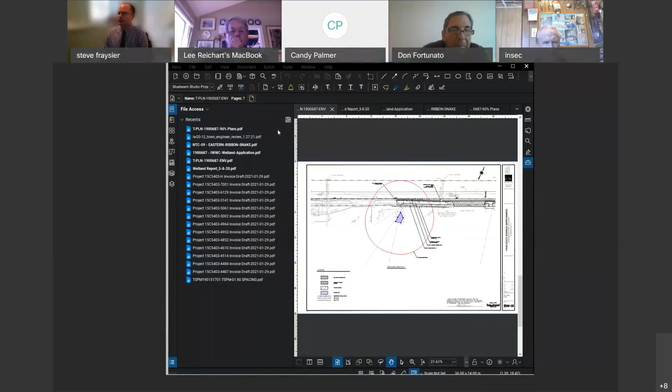Let me just share my screen so I can show the PDF. Are you able to see the PDF plan here? Yes, I can. Okay. So again, Steve Fraysier with BL Companies out of our Hartford office. I'm a licensed professional engineer in the state of Connecticut, presenting the sidewalk improvements in Pawcatuck along South Broad Street.

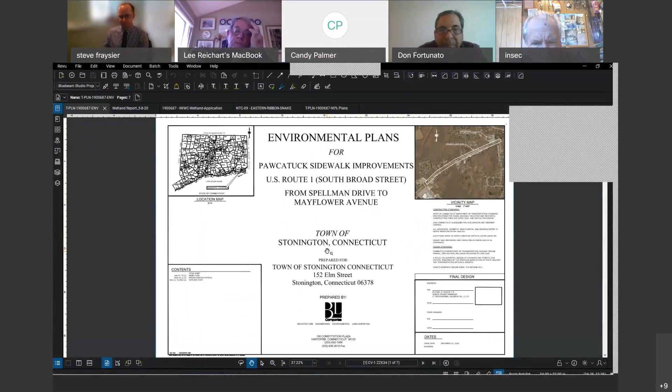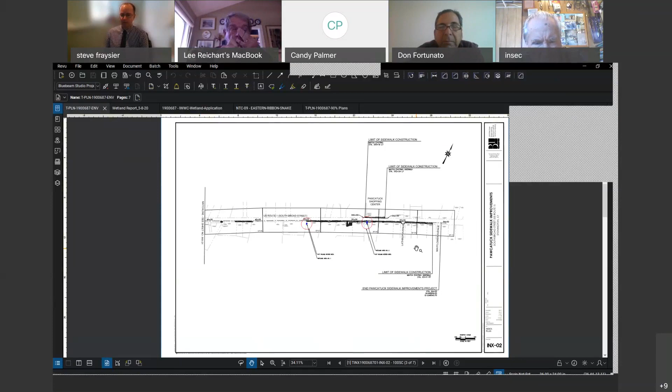The project limits for this project stretch from Spellman Drive down by the high school northward to just past the Pawcatuck Shopping Center; the limits are at Mayflower Avenue. The limits are long, and the whole purpose of this project is improving pedestrian safety through the corridor. There are existing sidewalk gaps where there are no sidewalks, and this project is going to close those gaps. We're going to construct new sidewalks in those areas. Where we can, we would put the sidewalk, which would be 5 feet wide, separated by a grass strip from the road and the curbing, and that grass strip would be about 2 feet wide.

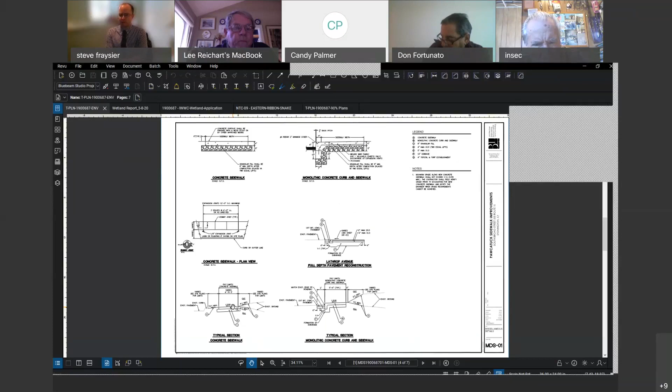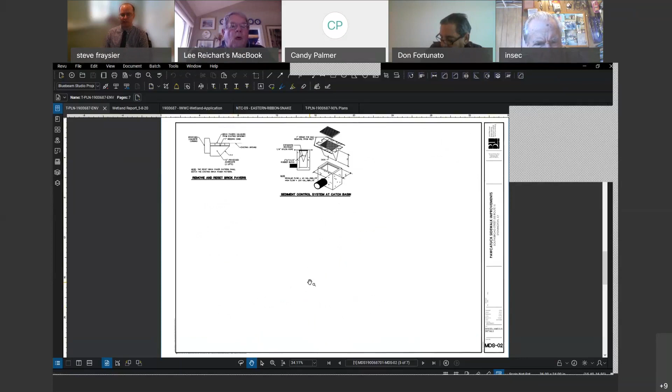However, there are a number of areas where that wasn't appropriate, whether it's for impacts reasons. There are areas where we have the sidewalk right up against the road, so it's the edge of the road, the curb is monolithic with the sidewalk - it's all one piece. Through this corridor, there are a lot of utilities as well, and I'll get into that in a little bit, but that definitely played into why we laid out the sidewalk the way we did.

In terms of the impacts to regulated areas that this commission is most concerned with, on the screen right now is the first area that we want to go over. Just to orient yourself, this location here is the Sunoco gas station.

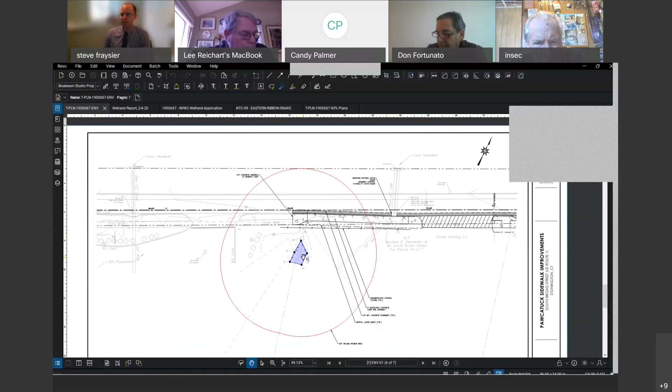This property right here is 56 South Broad Street. We're looking at an area of wetlands that we hired Davison Environmental to go out and flag back in May of 2020, at least within the project limits. This area, as well as the next area I'll go over, are the two wetland areas.

The improvements around this particular wetlands area are new sidewalks. As you can see from the plan, there's an existing sidewalk that ends, and continuing north there is no sidewalk. Our proposal is to build a new sidewalk right up against the road. In this area, the sidewalk will be 5 feet of concrete with a 6-inch concrete curb, and then the road. We're really not changing the edge of road at all.

It does require us to build that new sidewalk within the upland review. This line with Fs is showing the soil disturbance needed to construct that sidewalk, and the F stands for fill. When we construct this sidewalk, there will be a small amount of soil placed in this area to smooth over any construction impact, and then it will be topsoiled and seeded.

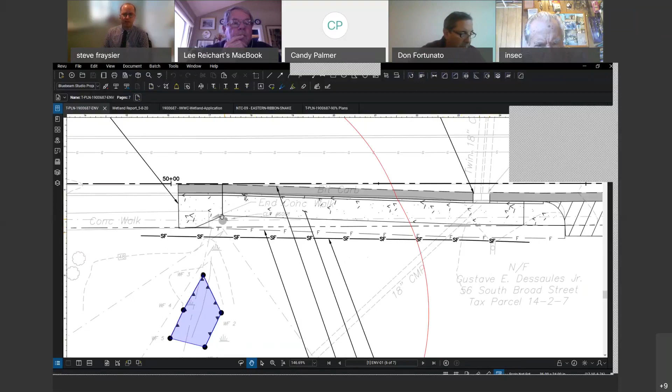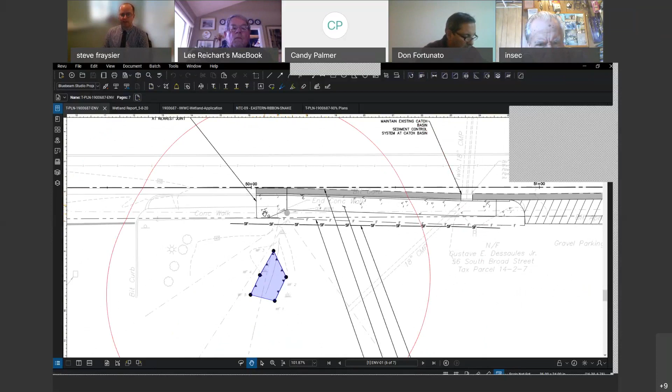There is an existing utility pole, so our proposal is reconstructing a small portion of the end of the existing sidewalk, making it monolithic with the road. In this stretch it's slightly wider, but it's to make that connectivity to the old sidewalk and go around the utility pole. We're not impacting the wetlands here. This work is occurring within the upland review.

During construction, there will be a sedimentation control system placed behind the anticipated slope limits to help with erosion control. There are a couple of catch basins at the edge of road in this area that we're not touching; they'll remain as is. We will put sedimentation control within those catch basins during construction to catch any construction-related erosion material, so that doesn't go into the water.

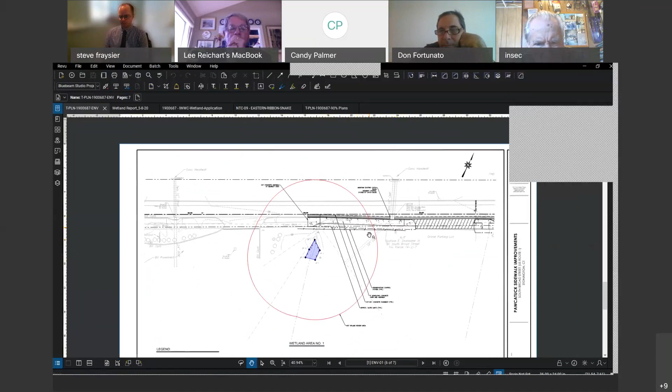I believe that's it for this location. The next location is moving, I guess, eastward or northward on US Route 1.

Oh, sorry. Steve, can I just ask — this is Lee Reichart. I just have a quick question. On the drawing here, the shaded strip, what is that?

In order to cleanly construct the curb and the sidewalk, we're going to saw cut the road 2 feet out from the existing edge of road and reconstruct that 2-foot strip of road in order to cleanly construct the curbing and the sidewalk. So the gray area is reconstructed road. I see, thank you.

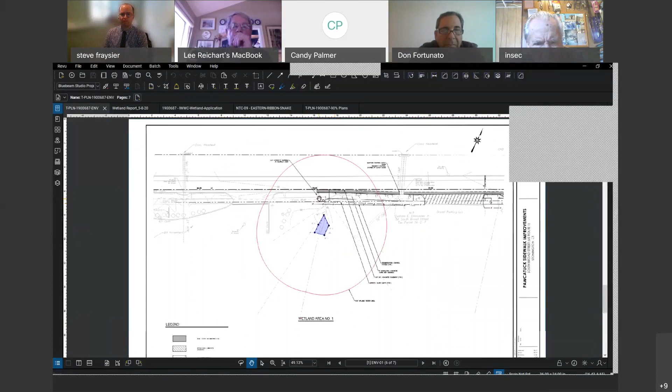Moving to the next area, this is a wetlands area across the street from the Pawcatuck Shopping Center. The plaza, for your orientation, is where I'm circling my mouse right now, on the northern side of the page. There's a lot of different things going on in this stretch of Route 1, and getting the sidewalks through here, this was the narrowest and trickiest spot for us to work with.

We came up with a couple different solutions. One of them is to build the sidewalk right up against the road, similar to the previous location. It's going to be monolithic. Again, that gray strip is the reconstructed road to get that sidewalk in.

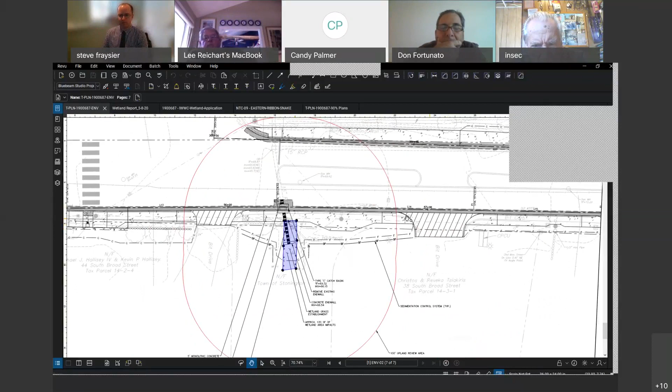We're also, in this stretch of road moving to the right-hand side of the page, northward, able to take advantage of an existing wider shoulder in the road. So we're actually building the sidewalk in closer to the middle of the road, reducing that wider shoulder to about 3 feet. That allowed us to build the sidewalk through here without impacting any of these utility poles, and maintain all of the stone walls on the properties through here. So there's a number of benefits — we're still able to get a 3-foot shoulder, and the travel lanes will still be 11 feet.

The shoulder helps with the drainage, collecting it down to this low point, a local low point. As far as the wetlands go...

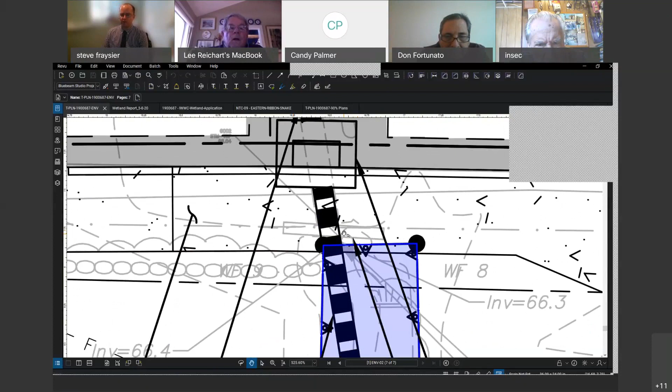I'll zoom in here. This light gray square is the existing head wall of a pipe, and just to get our sidewalk constructed, we would need to relocate that. So what we're proposing is extending that pipe out 18 feet and constructing a new head wall to allow the drainage water to flow through it and continue on its way. This pipe actually drains from south to north — the water goes in the pipe under US Route 1, under the plaza, and then outlets, I believe, to the northwest side of the plaza.

The reason we extended this pipe is, one, because of the sidewalk construction, and two, we extended it farther out to get this concrete end wall, or head wall, out of the clear zone of the road. The clear zone is a recoverable area where if vehicles were to inadvertently leave the travel way, they have enough time to recover back to the road. Usually you want that area clear of drop-offs as well as blunt ends, and since this concrete head wall presents a drop-off, we wanted to get it out of the clear zone.

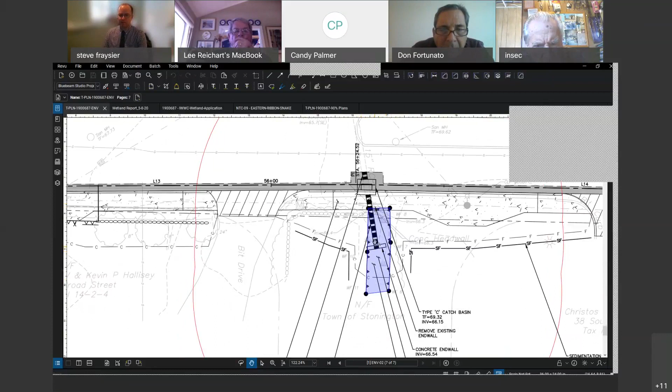So in order to construct this, they're going to excavate, remove the existing concrete head wall, extend the pipe, and place the new concrete head wall there. They're going to cover it with soil fill, treat it with topsoil, and then there will be turf establishment placed for seeding. In the particular area where there is wetland impacts, we're proposing to put a wetland grass mix.

Just to go over a couple of the different symbols, this line with the F indicates the limit of our soil disturbance to get all the grading needed to get this pipe in, as well as the sidewalk. It's a fill. Where it changes to a C, that's a cut where the earth is going to be excavated out, and in this area we needed to excavate to grade the existing ground down to the proposed inlet invert elevation.

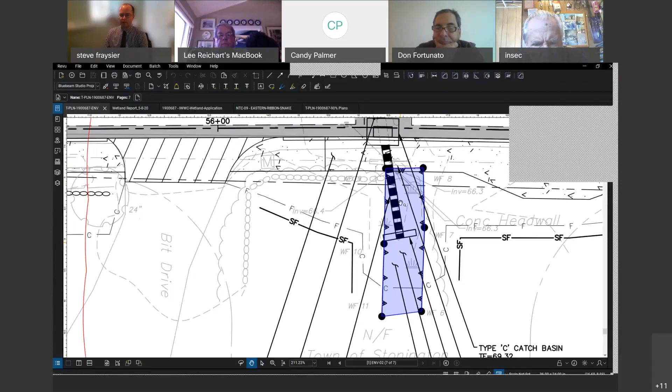The last portion I want to highlight is we're proposing to place a new catch basin right at the edge of road. There currently is no catch basin in this area, at least on this side of the road. What happens is most of the water comes down from Lathrop, just to the north, comes around the corner, and flows down the road on this side. There is no curbing through here existing, however the existing grades of the road actually act as curbing, because when the edge of road comes down, the grading actually starts building back up.

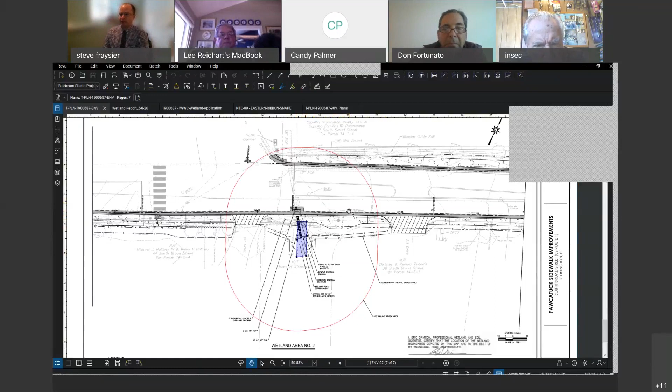So what we're doing is establishing curbing through here to help with the sidewalk construction and minimize erosion issues. But now that the natural area where water would flow into this wetlands area is being blocked by that curb, we're going to place a catch basin here to catch that water that was previously flowing over the ground and into the pipe.

I'm trying to think if there's anything else here. Again, same as the other previous site, when they construct this, a sedimentation control system will be placed at the limits of the grading to help with the erosion.

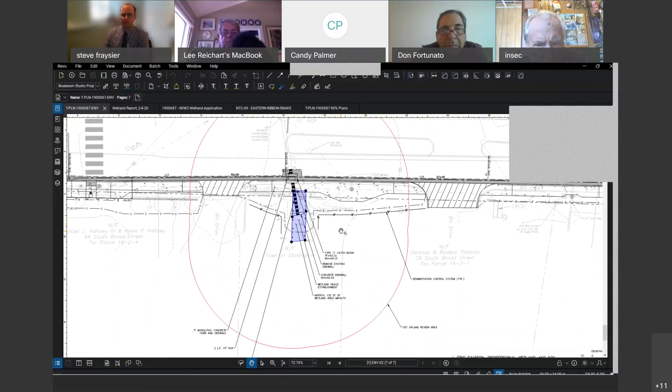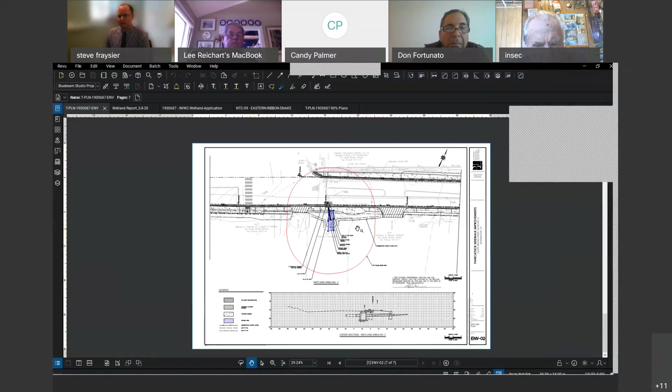I believe that is the project. Just to give you a timeline of what we're looking at, we're hoping to complete design this spring, and working with the town, we'll figure out whether it's going to be all or some of these sections that will be constructed. It's dependent on the available funding, but the hope is to get construction started and completed this year, with the completion date by the fall.

Correct. I guess we would leave that up to the contractor. We don't have a particular order of when and where the construction should occur. We would give them guidelines in terms of impacting traffic, and we're also going to give a guideline that if there are existing sidewalks, they need to maintain an accessible path if they're being stopped. But that's really about it in terms of construction requirements. Thank you.

All right, are there any other questions for Steve or for Susan? No?

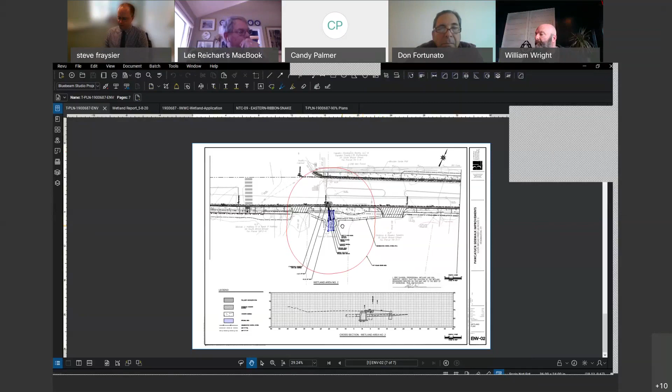I can actually jump in and respond. So we did coordinate with the Natural Diversity Database, and the eastern ribbon snake is known to have a habitat in the larger wetland area that is kind of back in this area, and then it flows to the south and in this area.

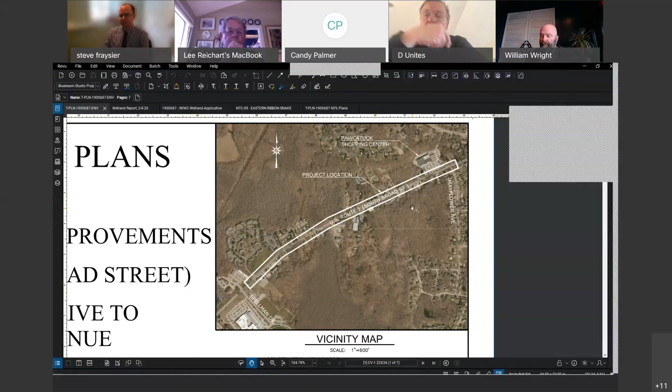Following their recommendations, what we're going to do is have a notice to contractor in the contract documents, as well as a couple notes in the plans that say please keep an eye out for this snake. Part of what they asked for was an awareness program to be established so that the contractor knows when they need to be aware of it, and if they're doing work out here and they see it, to relocate it and contact DEEP. So we'll have a notice to contractor to let them know that they need to do that.

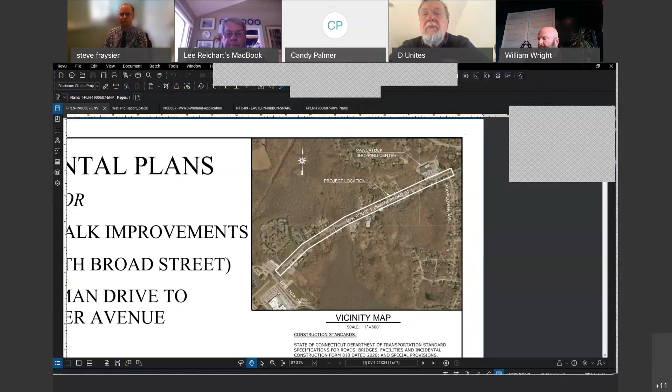Any of the commissioners have any questions? If not, I need a proposal from one of them. I'll read this one.

As the application will not significantly or adversely impact the wetlands and watercourses, and there is no character or degree of injury to or interference with safety, health, and reasonable use of property caused or threatened by the proposed regulated activity, a motion to approve the application with stipulations: one, staff shall be notified prior to the start of construction to inspect sediment erosion control measures; and two, all recommendations by the town engineer are to be implemented at the site plan.

I'll second. Wow, we're getting a lot of feedback from someone.

All right, let's have a roll call vote. Lee Reichart votes aye. Raoul? Aye. Dennis? Aye. And Bill? Aye. All right, the motion is carried.